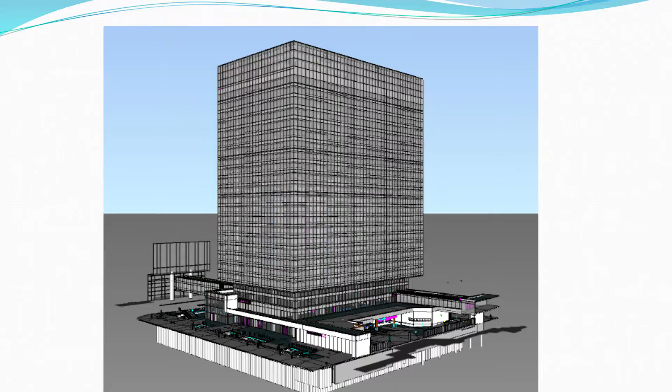So the other thing too is that we have 3 different towers in the downtown core, all starting at different times. So we really want to build on our lessons learned. We're creating our own trends that we use on other projects, but really focusing them and building on the lessons learned. So these are the 3 different towers. This is kind of like BIM porn. There's some really detailed information on here from a modeling perspective for 3 different towers done by 3 different owners, 3 different consulting teams, and 1 general contractor.

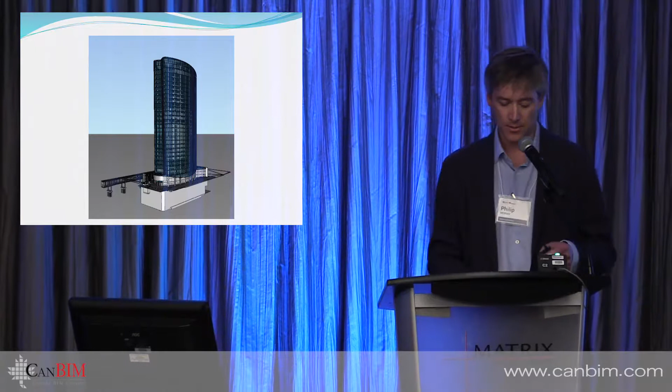So here are the 3 towers again, and what I have there is just like a crescendo. We started off with the first tower, and we're using the tools that we have, but we're going to keep building up and keep implementing new strategies and trends and stuff like that. So some of the stuff that we're starting off with on all the towers is that in the specification or the scope of work for subcontractors, they're required to model and go through the coordination process, and that'll be on all 3 towers, and starting on 2 of them at this point.

So we're also looking at increasing the level of development of the subcontractors' models, and then making sure that it gets deployed to the site, meaning that we go through the coordination process, and then they create drawings, and then it goes to site and things are installed as per the model, right? So that's the 3 towers. We're going to again increase the level of usage on all 3 as we go through this process and develop on our lessons learned. Okay.

So the trades that are typically involved that we all here probably see, we have the structural steel, curtain walls, all mechanical systems, and electricals. So we are looking at implementing controls, elevators, and also looking at using these models to do the concrete forming, so when creating shop drawings or deriving geometry from it. So there's that. The other thing that we're working on, sorry, I'll just go back to this. Sorry, the BIM coordination process.

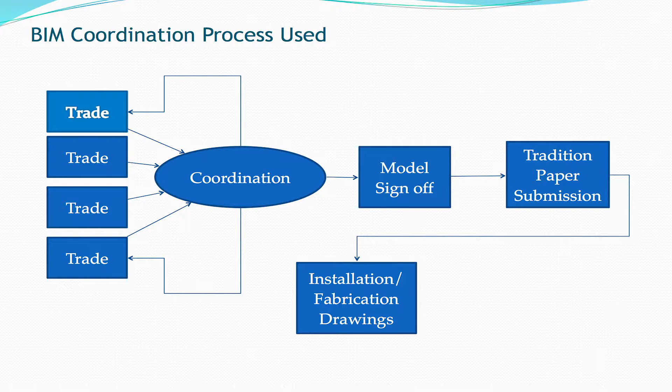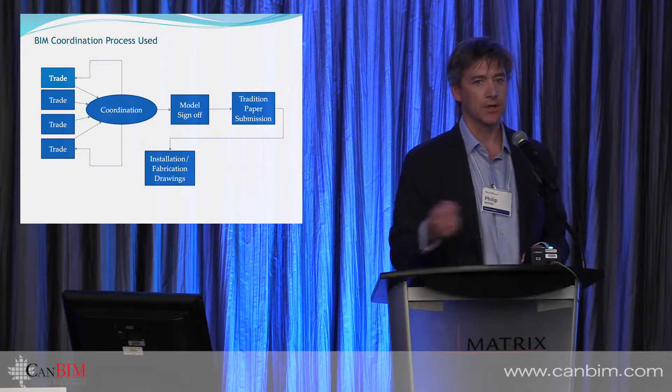The BIM coordination process being used here is pretty typical, but one thing that we're trying to implement is we got the trades, we do the coordination, it goes back and forth, and then, because there's so much effort that goes into creating drawings, we want everyone to get in the same room and sign off on the model at the state that it's in. And we've also had some buy-in from the consultants, who will come to the meeting and say, okay, we agree with this in principle, we still do need to see the drawing. So that's been one thing. And then we transition to the paper, and we go to the installation drawings.

Okay, so what we've also done is start implementing steel shop drawing review in the model environment. It's an interesting situation where we actually had the consultants, everyone on the consulting side, commit to this; EllisDon did. The subcontractor really wanted it. They came out, and in a 4-hour session we developed some procedures, right?

And then everyone made the commitment that they weren't going to use the PDFs. Even though the PDFs come along with the shop drawing, no one's going to mark up a PDF. They're going to use the procedures that we worked out. We have a living document that we're creating. And so hopefully from there, we're going to have some set standards, and then we can also look at putting that into the specifications for other jobs.

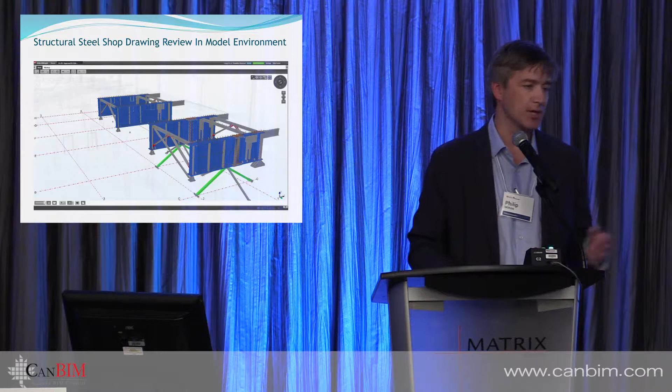So we'll just go back. So that's what you're looking at. You see, those are some big transfer beams. And over here, you have all the stuff that you would have with the drawings on the right-hand side there. We're only on approval 3, so we'll see how it goes.

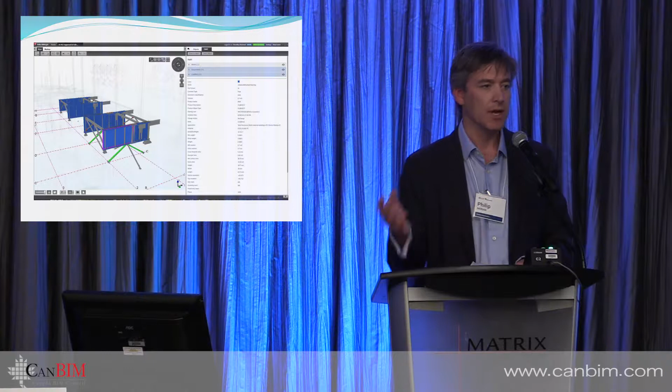Actually, I'm going to go back. Everyone talks about the speed. What we're really hoping to do, and what the goal was, is to provide clarity and certainty, not really pushing for anyone to guarantee that they're going to push their shop drawings through quicker. We stuck to the same process, because it is also a learning experience for everybody, right? But the commitment was there, so that's the important thing.

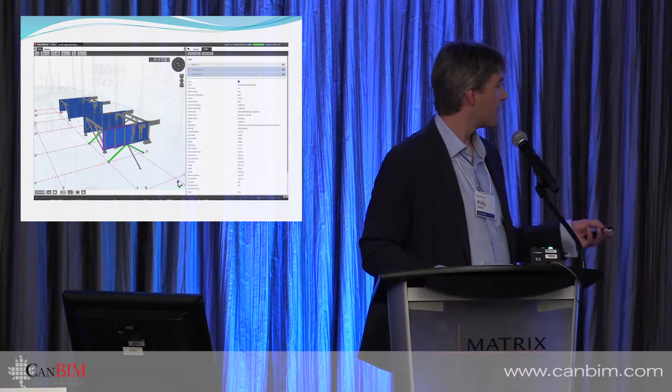All right, so one of the things that we're doing, and probably most of the people here understand, with that coordination process is all the subtrades are submitting their models, and we have progress models or live models. So the information's there. The subcontractor's intent is there. It may change until we get that sign-off.

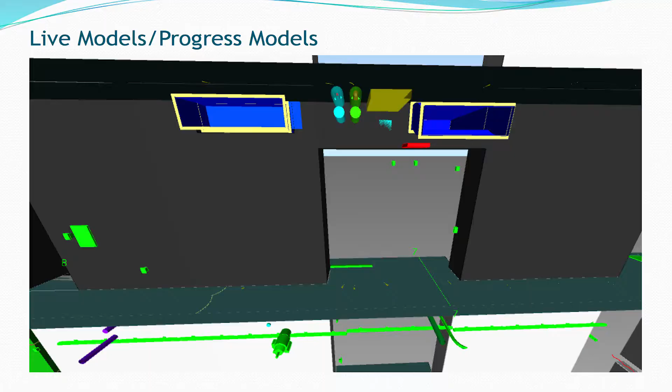So one of the things that I see as a trend for us is that now we can start getting people on our sites, like other coordinators, using some of the free viewers, instead of getting all 6 or 7 drawings together to understand what's going on. They have this, they know the state that it's at, and they know that it might change, or maybe they find a problem.

So it's getting to that point, especially when we get the subcontractors to give us progress models. Nothing that's an official submission. It's just, this is where we're going, this is the state of our model at this point.

The other thing that I see as a trend, and it's been asked by consultants when they give their models over to us, they say, well, what are you going to do with it? And as a general contractor, we're like, we're not going to do anything with it. With concrete buildings, I think there is an opportunity to come to an agreement with the consultants or everybody. Sleeving on a concrete building is key. There are some designed openings, and then there are some submitted from whoever needs a sleeve or a buck out.

So one thing that I've been thinking about that would be really good is if that's updated, because with mechanical, they're actually modeling in their sleeves and creating drawings from that. Then we submit the sleeving drawings, but it doesn't get put into the concrete model. So we can actually transmit that to whoever, and they can update, and then all the sleeves and buckouts will be in there, and it's a really quick way to do a check.

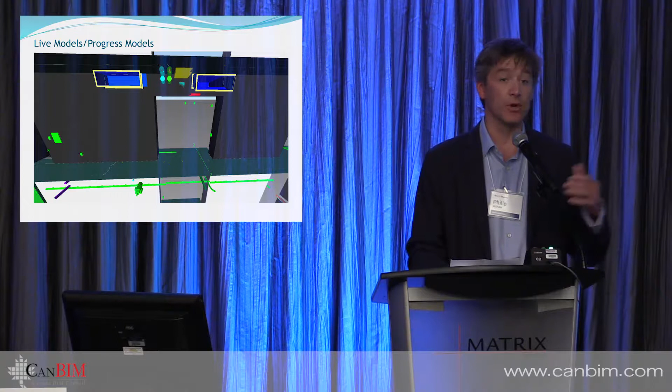Nothing catastrophic, but somebody had to go back. We poured more concrete, there was more rebar. There are times where you're building stuff off of the rebar drawings when you're under the gun. So those sort of things, if you get other people to look at the model and provide that clarity and then go back to the drawings to double check, then I think we're going to see a lot more certainty in our projects.

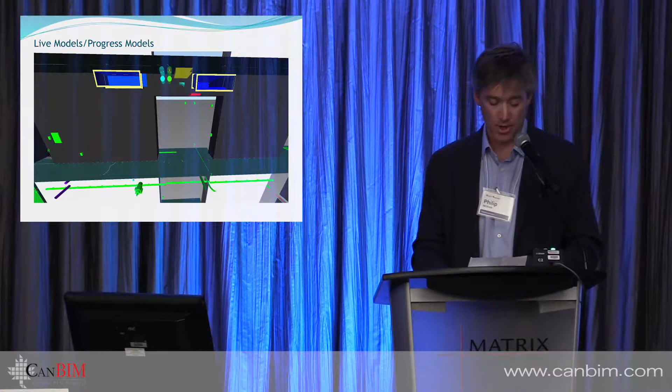So other trends and workflows that I'm seeing are especially from a field engineer usage. Using the models, what we've done is we've lined up our models to the project coordinates that the field engineers are using. So at any point you can pick and get all three coordinates and know where you are.

We all know that there's add-ons out there, but we're getting to the point where we're working with the field engineers. And that seemed to really grab some of the field engineers, especially when you're trying to get people to look at models and they want to know where they are instead of it being just some random coordinate. Then it really starts bringing things in.

We've also had some luck with implementing our own set of grid lines, because in Navisworks, which is what we mostly use, you can't measure off grid lines. But how do you build something if you can't measure off grid lines or know where something is?

So again, I've talked about this, but using concrete formwork shops, creating that from the models. From some of the things that I've seen Revit can do, I think it's quite possible. Instead of having the foreman on site with the big drawings, why are we not just taking these models, sequencing them and then giving them formwork shop drawings? I think that's coming fairly quickly.